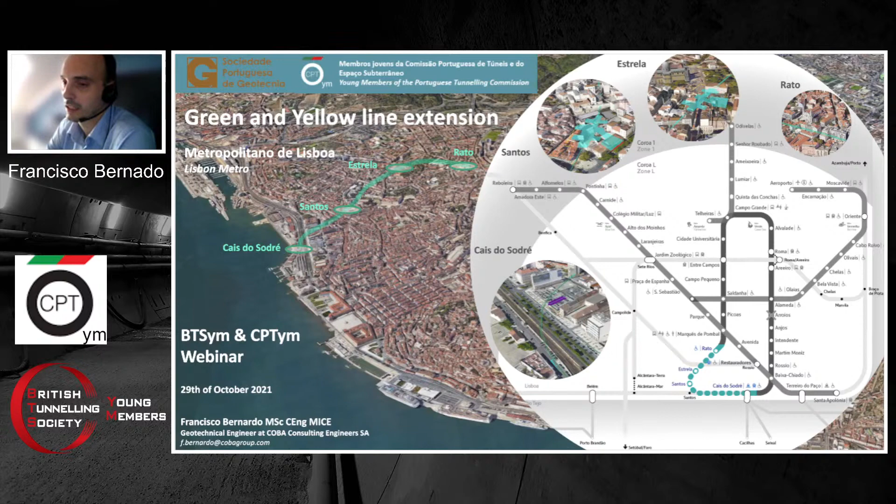Thank you, Louis. Thank you, Divik. First, I'd like to thank BTS young members and CPT young members for the invitation to present this project today. The project is called the Green and Yellow Line Extension, an important upgrade to the existing metro network in Lisbon, now at a very advanced stage of development. Today I'll show you some images from the preliminary design, and hopefully by the end I'll be able to show you more advanced information about the current stage of the project.

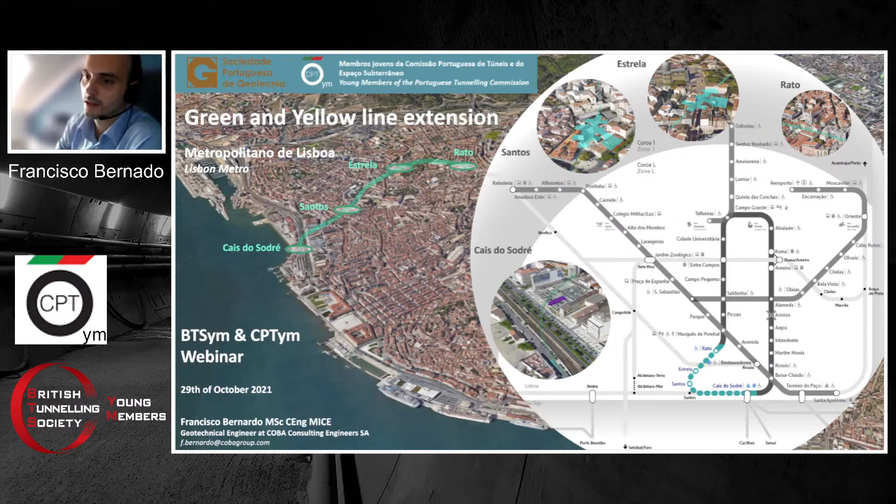So, going to the agenda for today: first I'll give a quick overview of the history of the metro in Lisbon, then talk a little about the existing metro network for those not familiar with it. Then I'll discuss the whole project, some geotechnical aspects, and other interesting details about the project. After that, I'll give a general description of each of the main excavation works that form part of the project. Finally, I'll give a quick update on the current status of the project and the planned timeline to complete it.

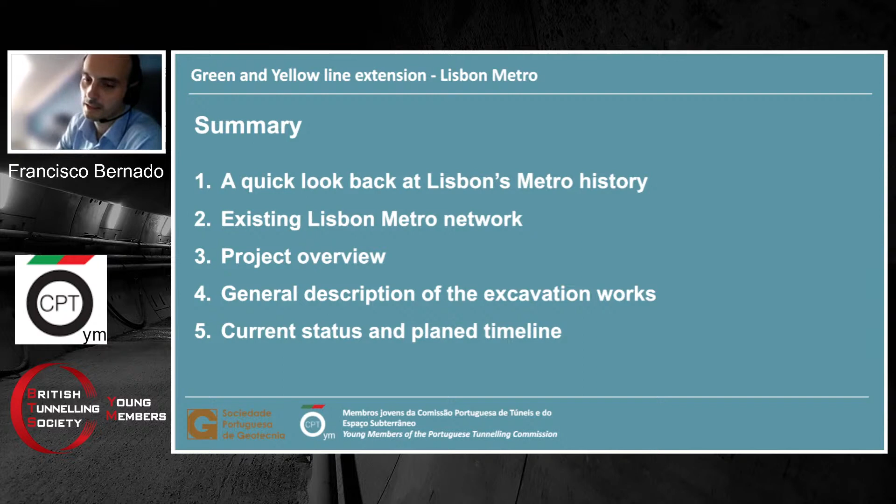Going back to Lisbon's metro history, Lisbon Metro Company was founded in January 1948. The early studies for developing a metro network in Lisbon started earlier than this year. However, due to economic issues, it was only possible to open the first route in December.

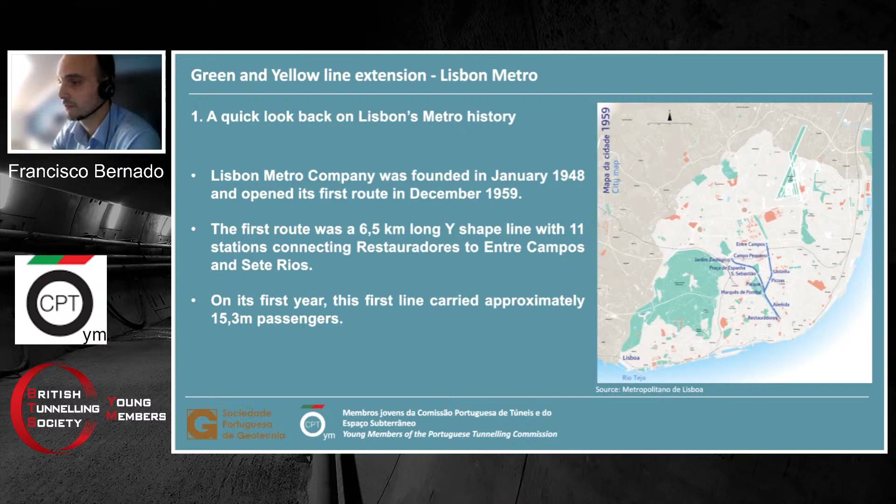1959. The first route was quite a big and important route. It had 6.5 kilometers of extension with 11 stations, and had a Y shape, the one you can see here in this picture, and it was connecting Restauradores to Entre Campos and Sete Rios. There was quite a demand for this project, because in its first year it carried about 15.3 million passengers.

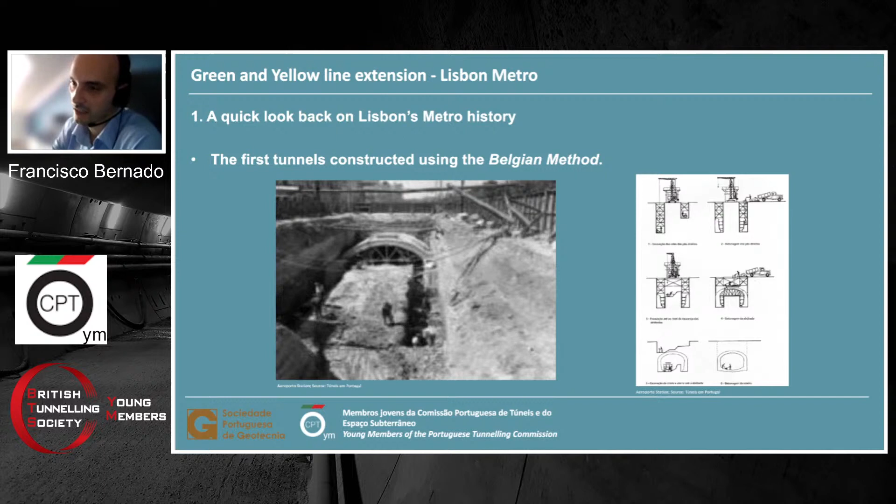So the first tunnels, in terms of the construction methodology, were very basic compared to today's standards. The method used at the time was the Belgian method, which we can call a derivation of the more usual cut and cover method. As you can see here in the picture, it was about excavating a trench and casting the lining at the bottom of the trench, and then from the interior of the lining, removing the ground, and of course reinstating the ground to street level.

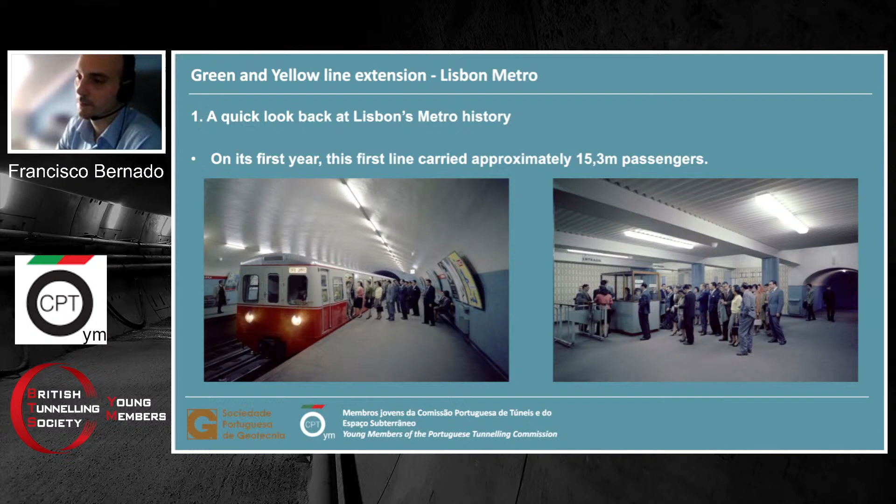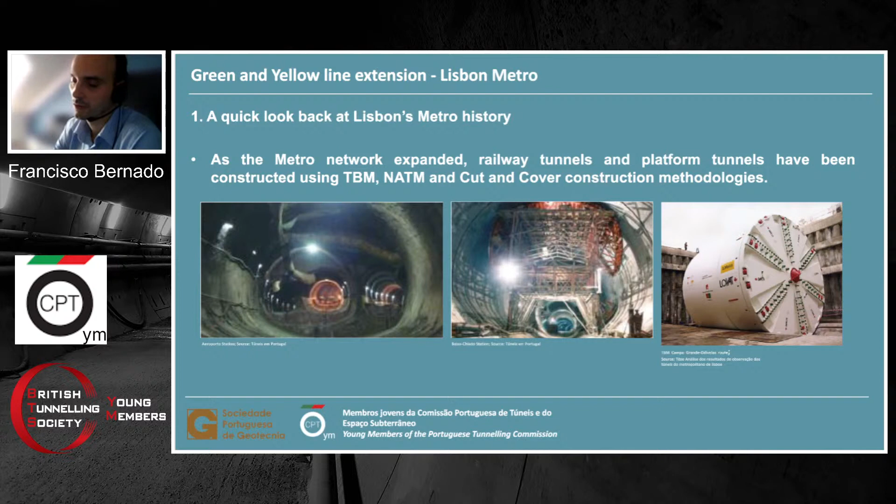And of course, as the network expanded, new construction methodologies were used in the extension of the existing network, using different and more modern construction methodologies such as TBMs, cut and cover construction using different types of elements, and of course using SCL or NATM methodologies to construct the tunnels.

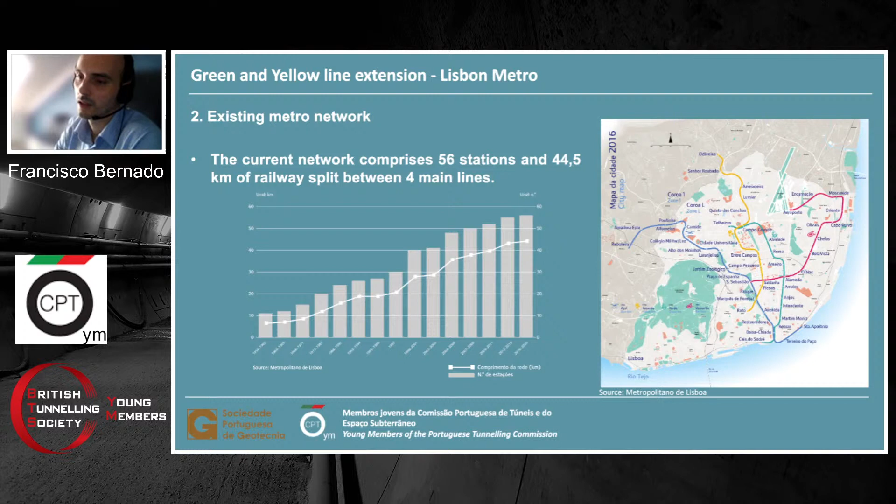Looking at the existing metro network, on the right-hand side you can see the diagram of the existing network. Today, Lisbon has a metro system with around 44.5 kilometers of railway and includes 56 stations. You can see on the left-hand side the development of the number of stations and the total length of the tunnels over the years, with a particular increase from the 90s to nowadays.

These are a few pictures of how the tunnels and the stations look like nowadays. In its record year, 2019, Lisbon Metro carried 173 million passengers, and the demand continues to grow.

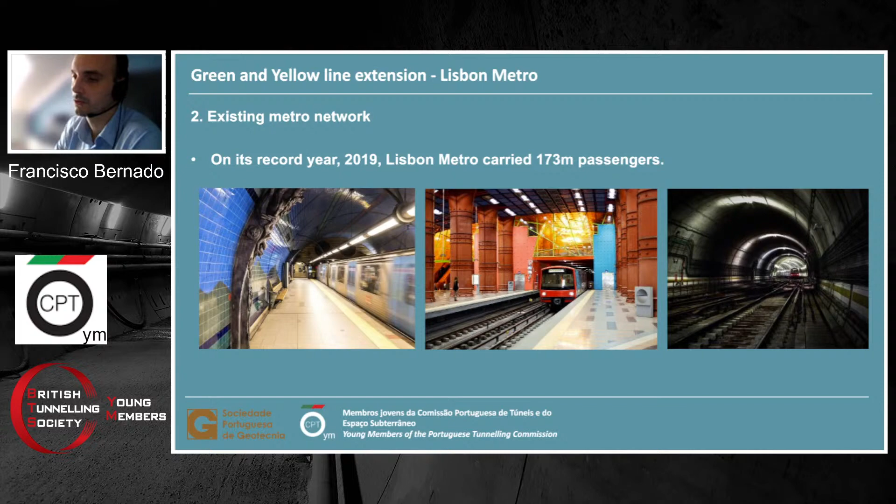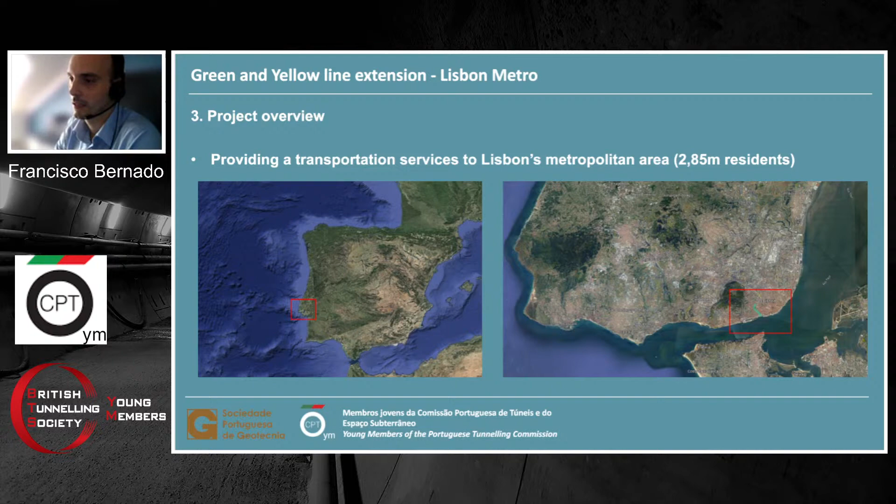Now, looking at the project that I'm going to focus our presentation on today. Two pictures here of where the project is located. If I go to the next slide, you'll see.

So the new project, the new extension, connects Rato at the hilly part of the city, and it goes down all the way to Cais do Sodré, which is located near the river. This section goes through quite an old part of the city, and includes some sensitive assets along the way, which of course will have to be considered in the design and construction of this project. On the right hand side, you can see isolated the extension of the project, and as you can see here again, it is connecting Rato to Cais do Sodré.

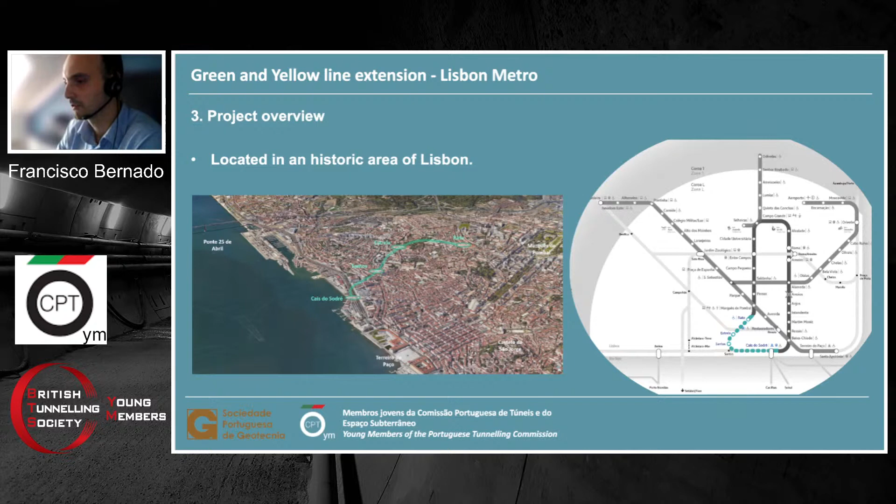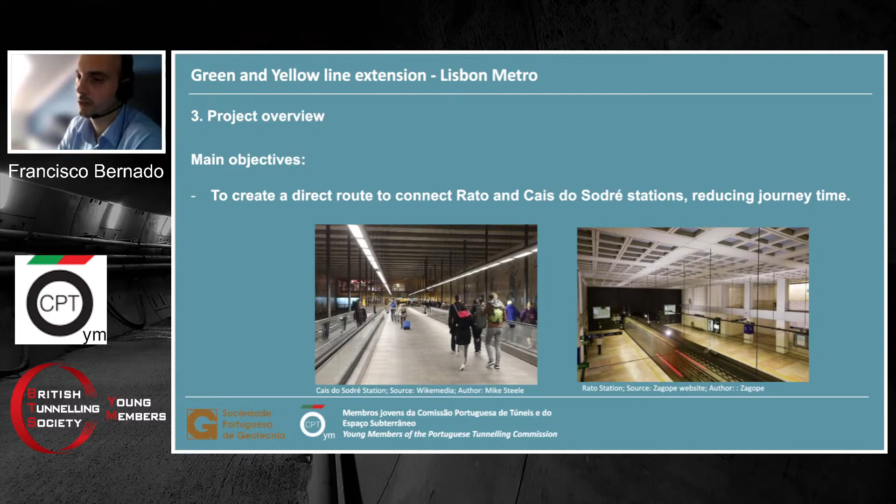This project has a number of drivers, key reasons to be developed. I'm going to highlight three of them in this presentation. The first one is to create a direct route to connect Rato and Cais do Sodré, which currently takes a longer journey to go from one station to the other, and requires changing at different stations to get from one station to the other. So this route will of course create a direct route between the two stations.

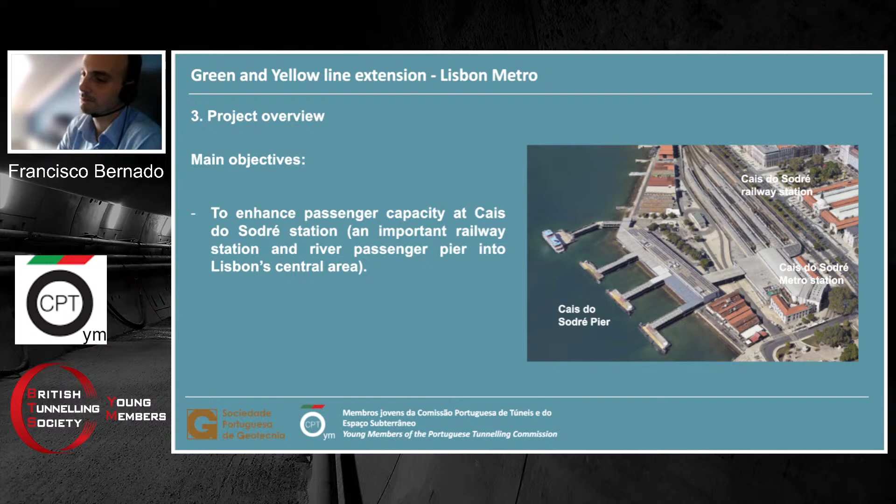One of the other key reasons for this project is to be able to provide at Cais do Sodré, which is an important railway station and an important pier, additional capacity to take passengers to the city center. Cais do Sodré is a station which already receives a significant number of passengers from Cascais and from the south side of the river Tejo. By creating this new connection, Cais do Sodré will be able to offer an improved service to passengers that arrive there.

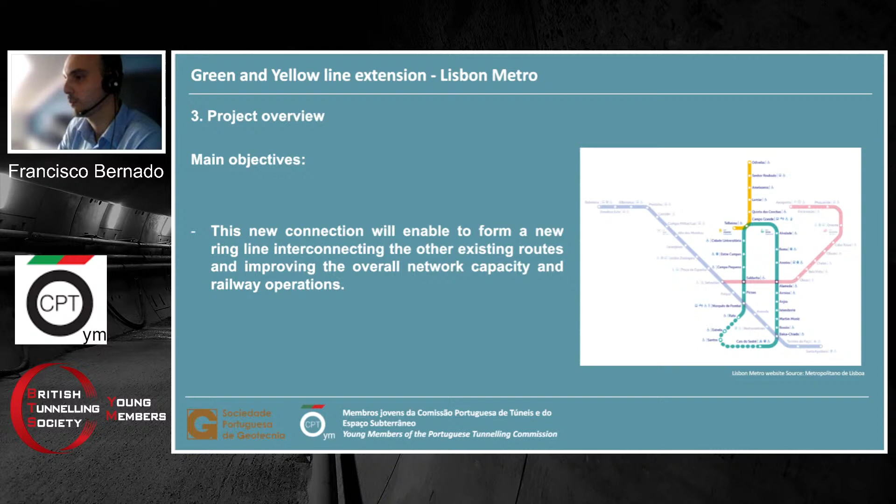The third reason that I am highlighting here is the fact that this connection will create a circle line, which will have significant gains in terms of operation and overall network capacity for the metro network. As you can see here in this picture, this connection will form a ring line which will intersect the other existing stations.

Currently, the project has already started. The excavation works are ongoing, and the contract was awarded to Zagope Construção e Engenharia, and the designers for this contract are CJC.

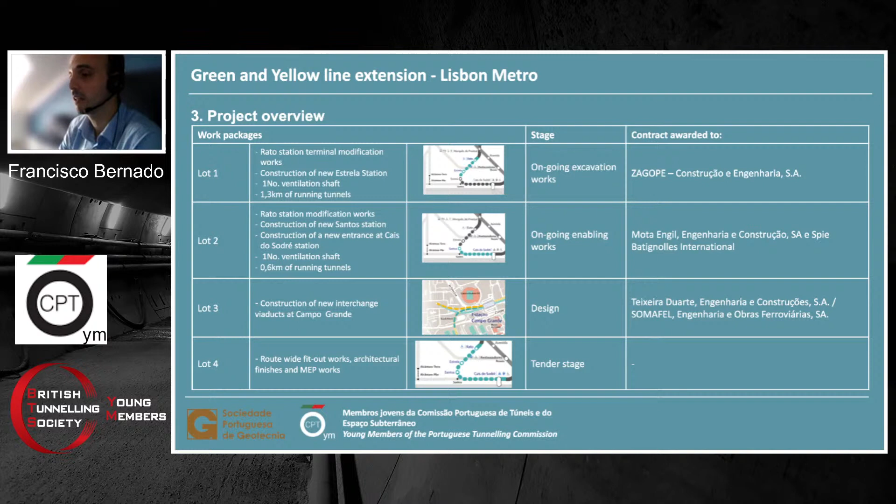Lot 4 is a route-wide package and includes all the fit-out works, architectural finishes, and MEP works. That package is still at tender stage.

Now looking at some more interesting aspects of the design and the project - this slide shows the geotechnical profile of the route, starting at Rato and ending at Cais do Sodré. Let me see if I can point to something here. Hopefully you'll be able to see my cursor. Luis, can you see my cursor? I can't see it. Okay, good. So I can point towards a few things - we have Rato starting here, and we have Cais do Sodré at this point here.

As I said before, the project starts at a very hilly part of the city, and it goes all the way down to a lower part of the city, close to the river. At the beginning of the project, the main materials that the project will be facing will be limestones. And at the end of the project, the alignment will slowly start to face materials of lower quality.

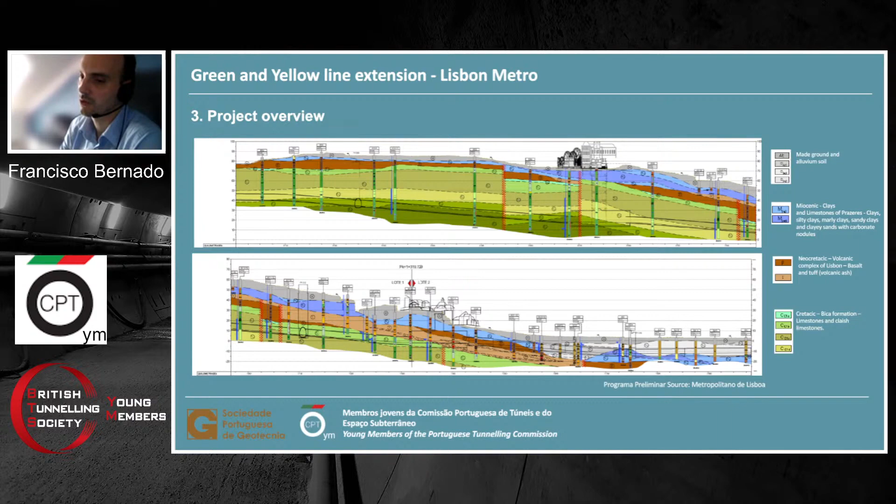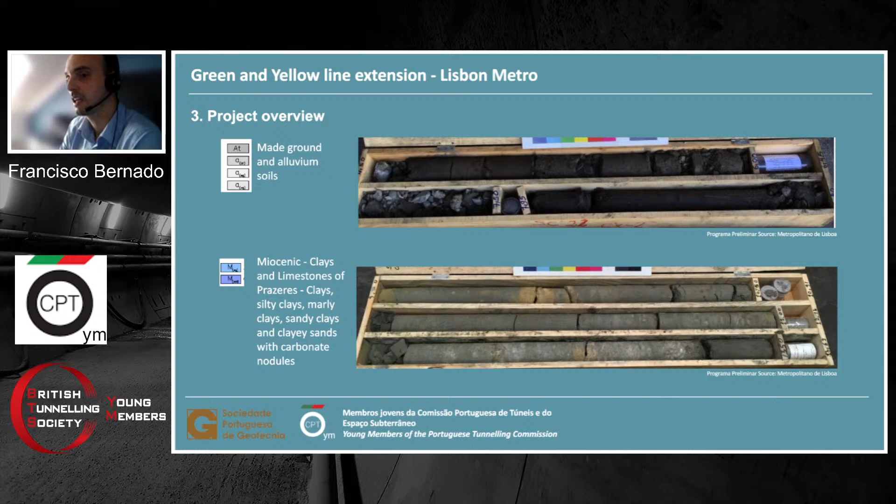This slide shows a few images of how these materials look like. The first picture on the top shows how alluvium looks like in Lisbon, in that part of the project. The picture at the bottom shows how the Miocenic looks like.

Then this picture here shows how the Neocretacic looks like, with some basalt included in this complex, and some tuff, which is basically volcanic ash - how those materials look in this box. At the bottom we can see a picture of the Cretacic, which is essentially limestone with different levels of degradation and alteration.

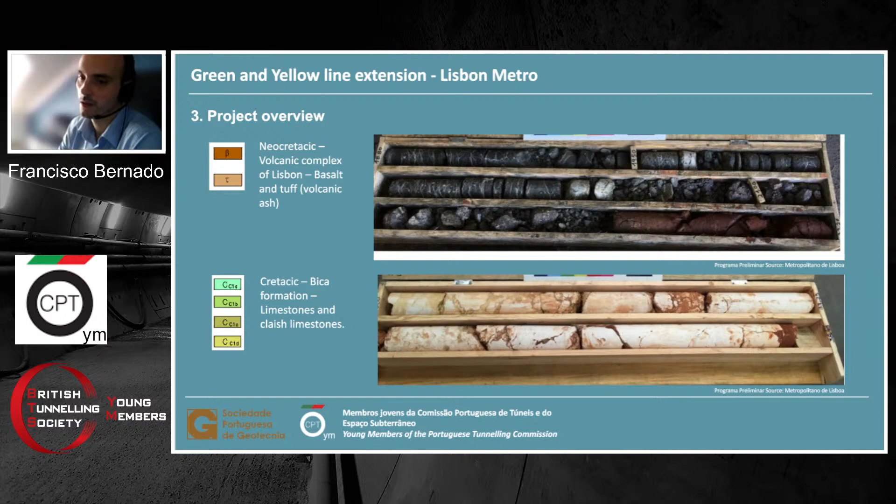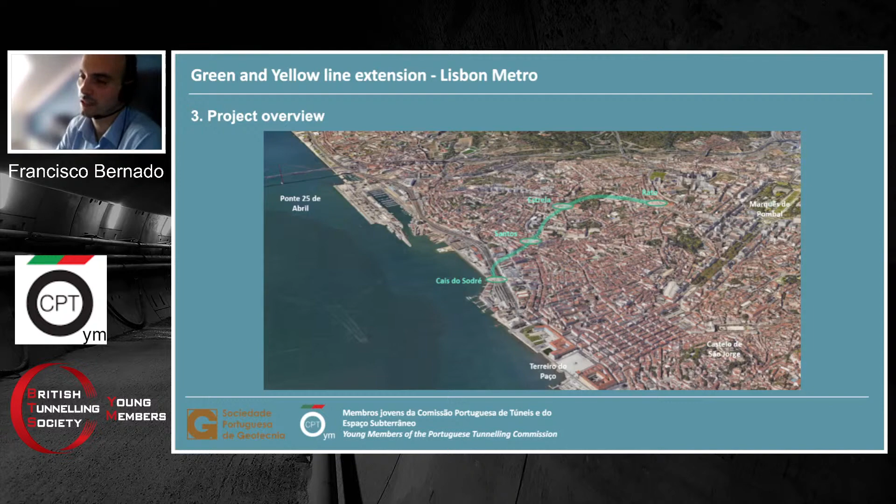For those of you who have perhaps already visited Lisbon, this picture shows how the project is located in the overall landscape of the city. I have included a few landmarks of Lisbon - we have the 25th of April Bridge on the left, Terreiro do Paço at the center bottom, Castle of São Jorge on the right hand side, and Marquês de Pombal on the top right hand side. You can see in this picture how the project looks like in the overall landscape of the city.

In terms of alignment and main works included in this project, this picture shows how the alignment of the new project connects to the existing yellow line. On the top left, you can see the end of Rato station, which at the moment already includes some tunnels to park trains and to also carry the necessary ventilation for the route.

So there's a shaft. Can you see my mouse here? Can you see my cursor here? Not very well.

Sorry, Divik. Okay, let me just go back. Let me just try again. What about now? We still can't see. Can you see something now? You can. Okay, perfect.

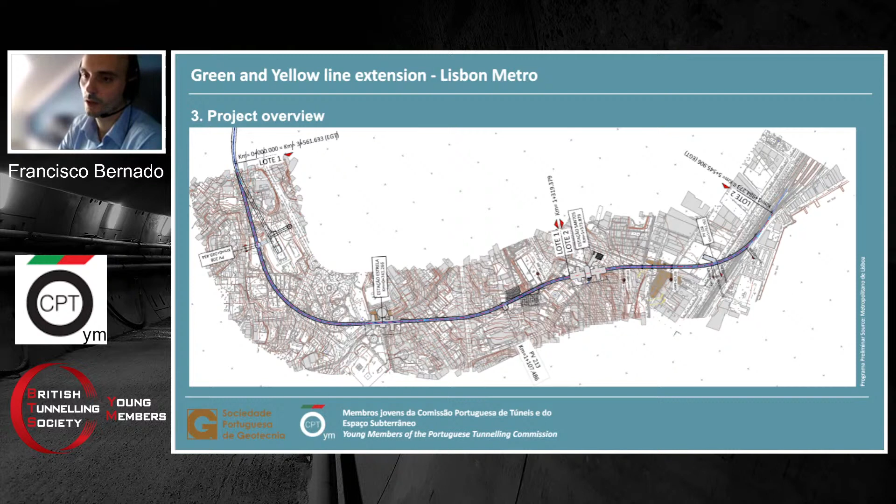So this picture shows you a longitudinal profile of the project. We can see here that the first 700, perhaps more, the first 1 kilometer of the tunnel alignment will face quite a significant overburden. So we're talking about 45 meters of cover.

And you can see here in this picture the position of Estrela station and Santos station in the alignment. The other fact I would like to highlight is because we are descending from a hilly top of the city all the way down to the river, we will have gradients of around 4% as we descend from the higher level to the lower level.

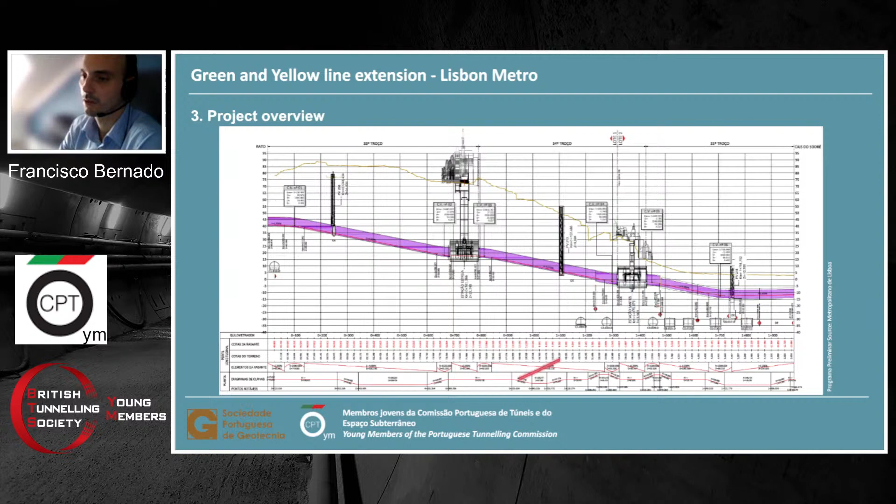So now looking at each one of the sites and each one of the works that the project comprises. One of the works will be the construction of the cross passage to the existing tunnels where currently trains are being parked. And the other work will be the crossover between the tunnels where the trains are being parked and the new line that we are constructing.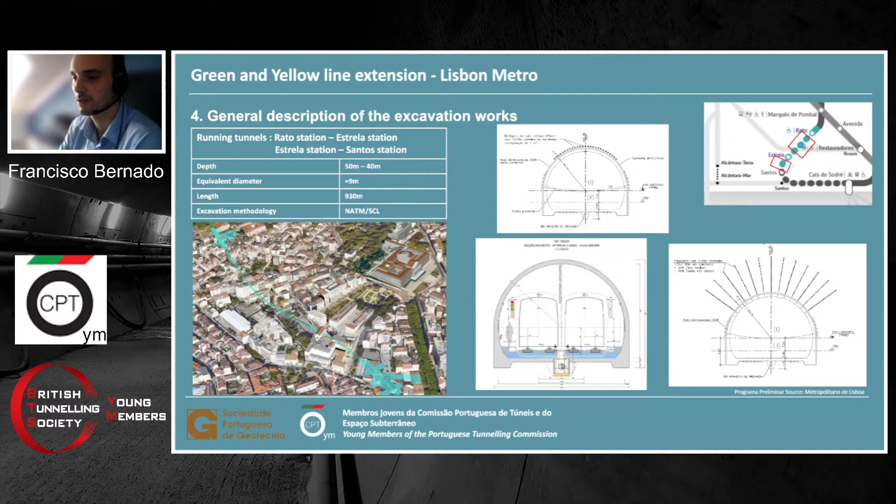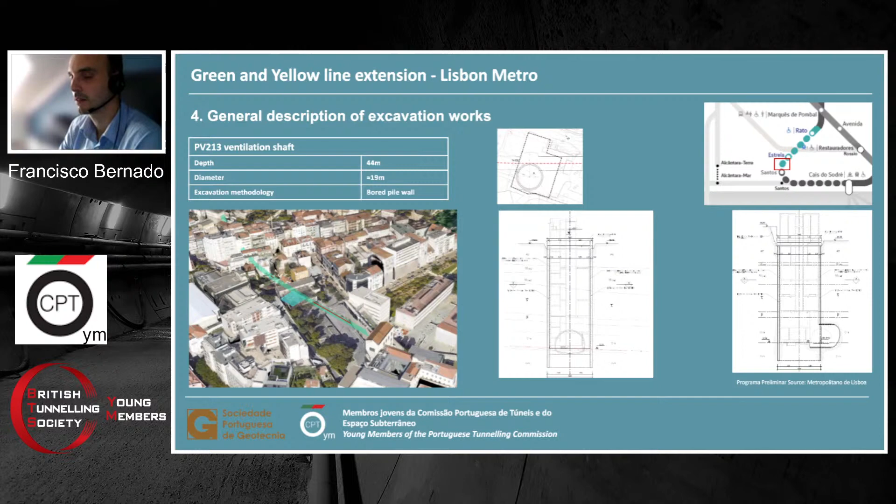Looking at the first ventilation shaft, it will be constructed using a bored pile support. The diameter will be around 19 meters and the depth will be around 44 meters.

Looking at Santos Station, which is now part of the package that I'm currently working on, the station will, as you can see in this picture, face some very different conditions in terms of overburden from one side to the other side. It also faces some difficulties in terms of insertion of these works in the overall urban environment of the city in this area, which has very sensitive assets at this location.

The length of the station will be the same as Estrela station, 105 meters. The main platform tunnel will have an equivalent diameter of approximately 18 meters. And as I mentioned, it will face very different overburden conditions from one side to the other, with 40 meters on one side—these numbers relate to axis level. On the south side we will be facing perhaps only 15 meters of overburden to axis level.

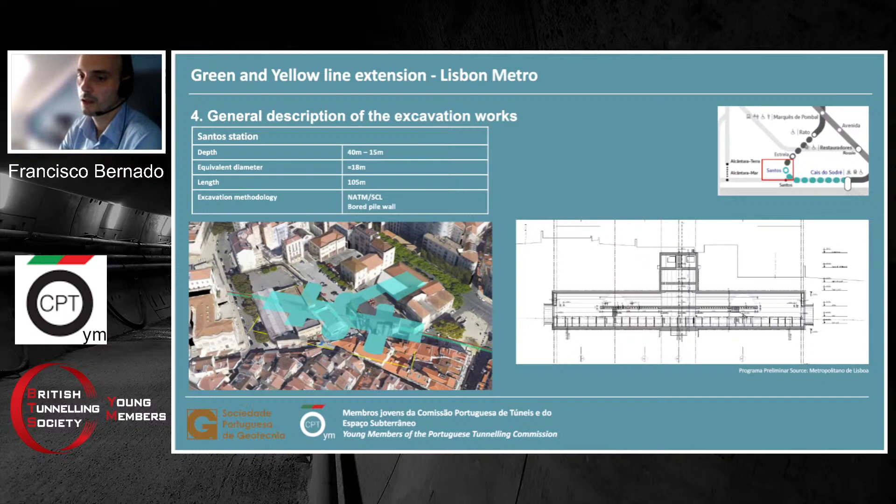Now, looking at the section of tunnels from the end of Santos Station to almost half of Avenida Dom Carlos, we will be excavating that section using SCL NATM construction methodology. The tunnel will have the same equivalent diameter as the section before.

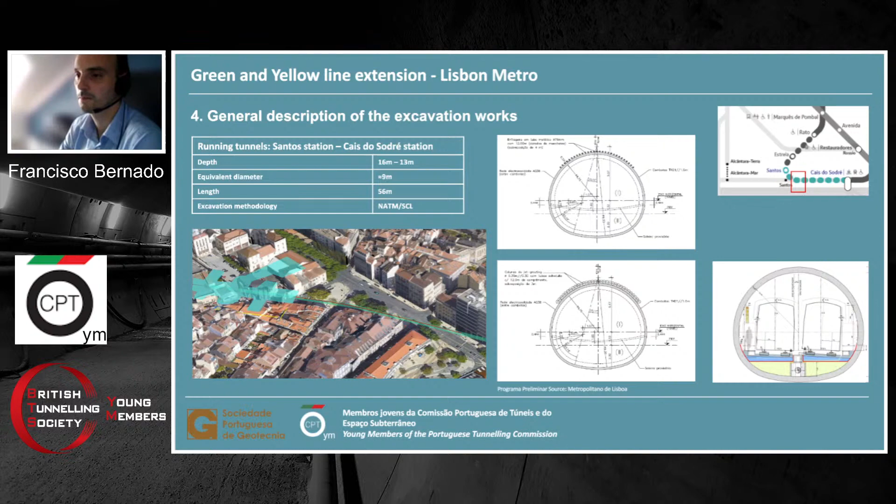Approximately at the point where I have my pointer here, the excavation methodology will change from a tunnel to cut and cover, which I will show in this slide. So approximately at that point, the cross section will change, and the construction methodology will change to the cut and cover methodology, where diaphragm walls will be used to form the support of that excavation.

Halfway through that section, the second ventilation shaft will be constructed. That shaft will be constructed in materials of very poor resistance, alluvium, for example, and will also be constructed using diaphragm walls. The maximum depth of this ventilation shaft will be approximately 22 meters, and you can see on the right hand side some cross sections of this shaft.

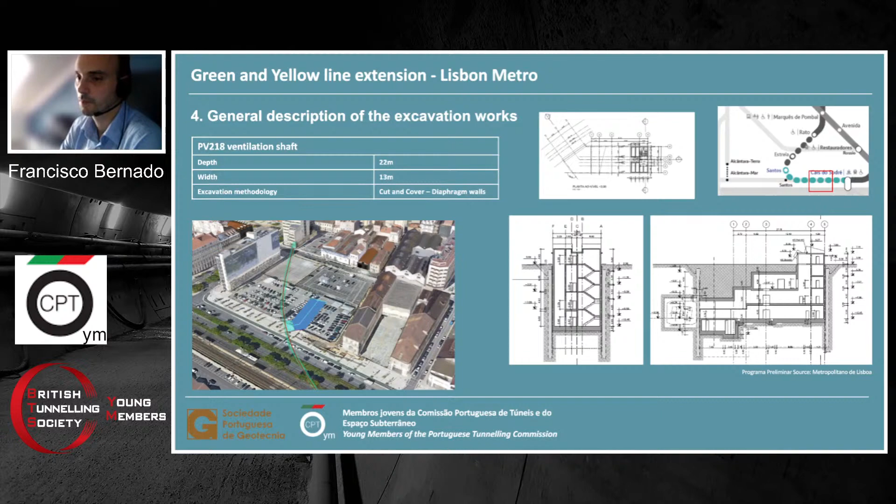Now, I just want to highlight one interesting fact. If we look at Cais do Sodré station, it already exists, it is part of the existing green line, and this new section that we'll be constructing using the cut and cover construction methodology will be connecting onto the existing station. What you can see in this picture is how we will intersect the existing station here.

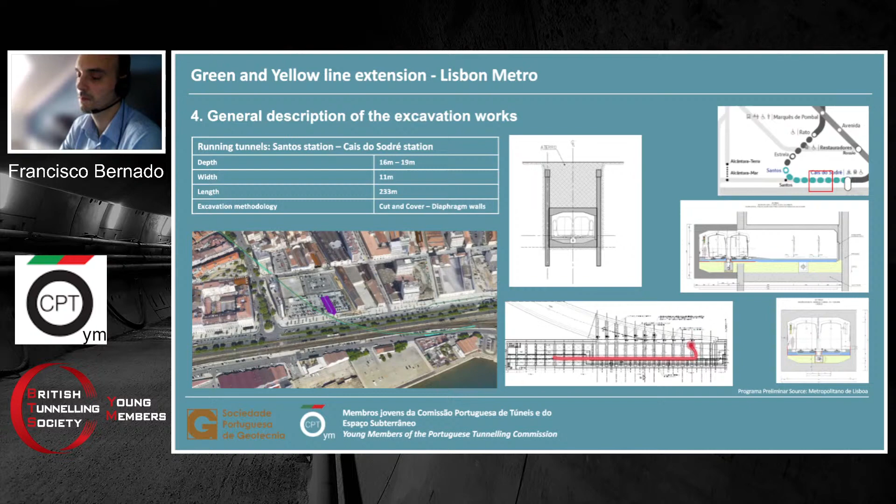Now, looking at the last element of this lot of the project, lot number 2, there will be the need to construct a new entrance in the existing Cais do Sodré station. That new entrance will be constructed using the cut and cover construction methodology, using sheet pile walls, and the maximum depth of that excavation will be 7 meters.

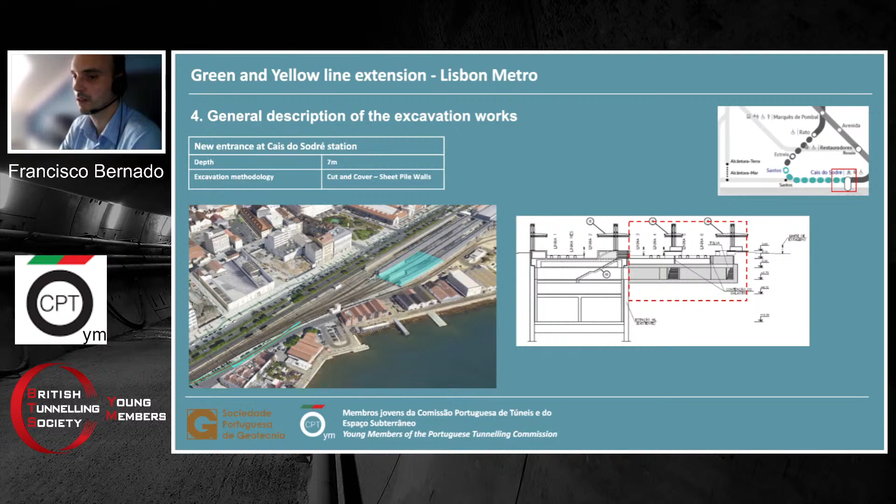Now, I would like to show you a video of how the sites look, and this video will also show the current status of the works. This video was released by Metropolitano de Lisboa, which is the owner of this project, on Monday. So it's quite a good update for you guys to have on where the project is at the moment.

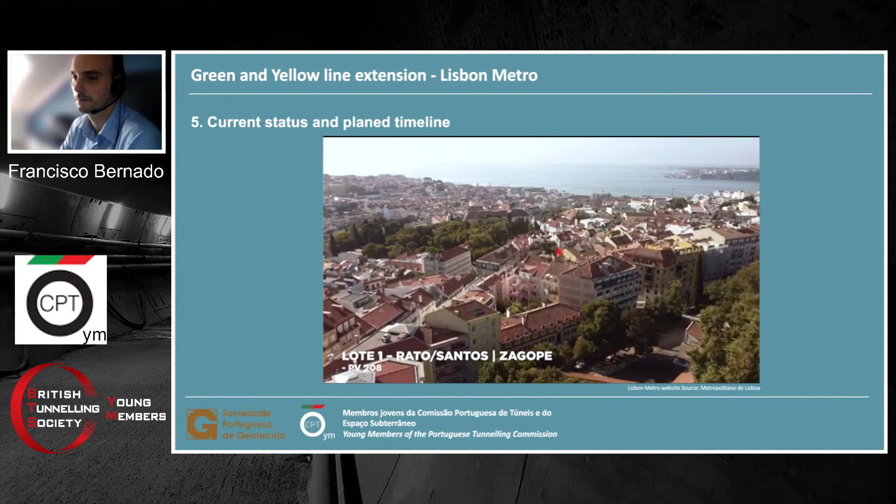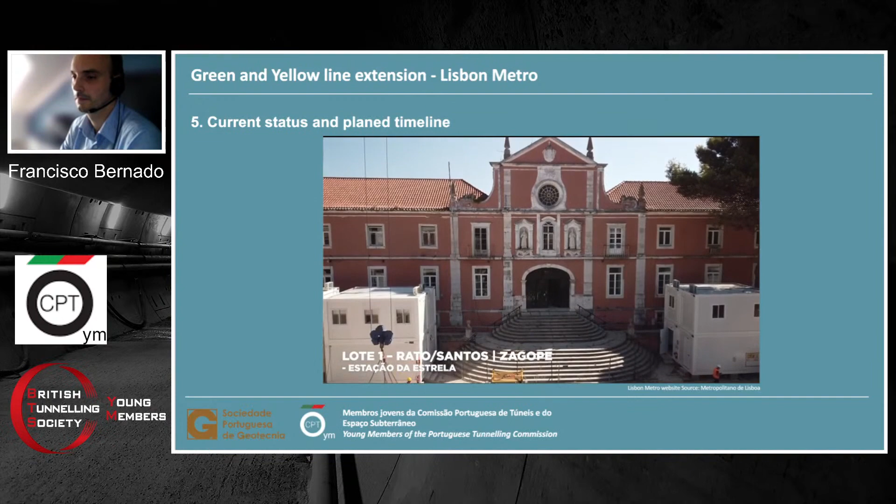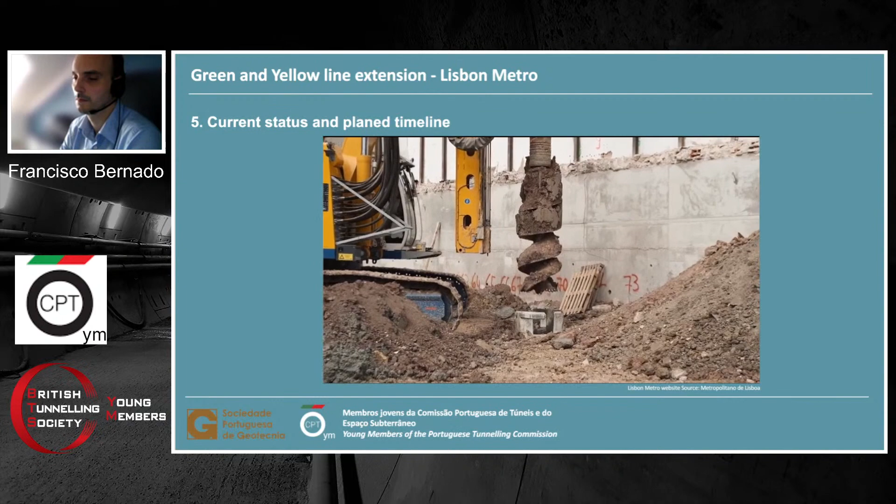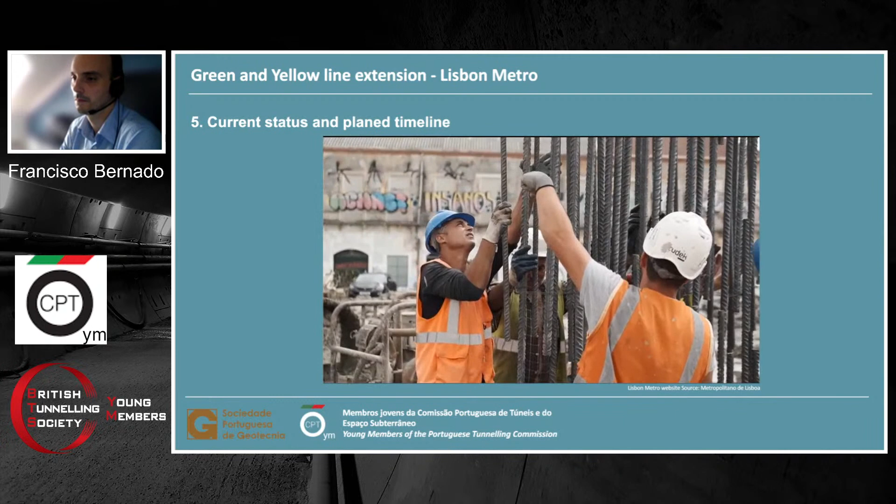Let me just try to see if I can press play.

Okay, right. So in terms of the planned timeline to complete the project, the current forecast to complete the project and to start passenger services is Q4 of 2024.